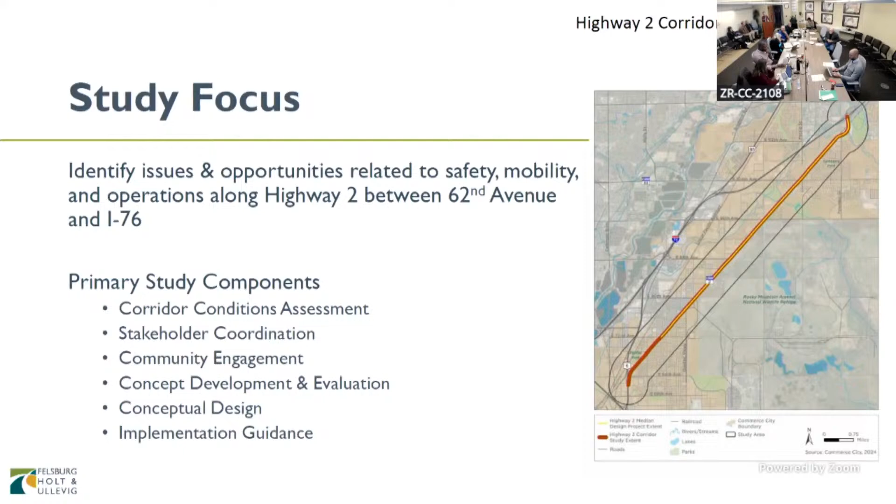These are just a couple highlights from the existing conditions work, the first technical thing we did in the study. One of the primary reasons we're doing this study is that there's a pretty substantial safety concern on the highway. Our analysis period was 2018 to 2022, and in those 5 years there were 134 severe crashes. What we mean by that is a crash that resulted in a fatality and/or injury requiring hospitalization. There were many more total crashes, but we focus on severe crashes because we're trying to make our streets safer and don't want anyone to be hurt.

Traffic volumes along the corridor—it's a 4-lane roadway. Traffic is quite a bit higher in the central part where it goes by the Arsenal, and towards the north it's lowest in the older part of the city, but ranges from 12,000 to 20,000 vehicles per day. An interesting quirk of this corridor is that southbound volumes on Highway 2 are pretty consistently significantly higher than northbound, by about 15 to 20%.

I assume that's probably because, when you think about Highway 2, on the north side, you're bisected by the railroad, so there's not really many connecting streets. On the south side, with the newer and older development, you have a network of local streets you can use as a bypass, but it's just kind of an interesting thing you don't see on a lot of arterial roadways.

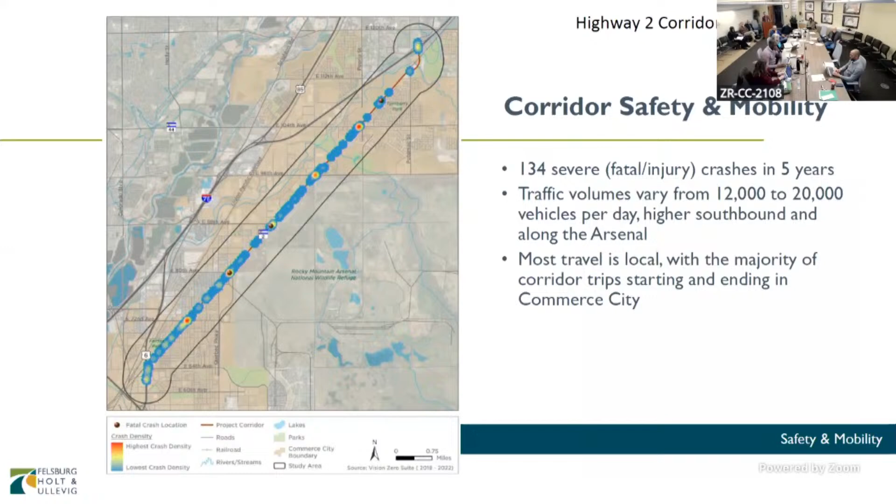In terms of corridor connectivity, another impetus for this study, and something we focused on a lot, is the multimodal element of Highway 2. Highway 2 is a very car-centric road. It works pretty well if you're in a car. It can be, especially on the south side, a very challenging roadway to interface with if you're not in a car.

One benefit of Highway 2 compared to a lot of arterials in the Denver area is the trail already existing along the Arsenal and going all the way north. That's a really high quality, safe, comfortable multimodal bike facility. It's really when you get south of Quebec, where that trail ends, that you just have an attached sidewalk and some striped bike lanes. It's a pretty tough place to be a walker or a biker.

Also, getting across the highway, because of the nature of both surrounding land use and the railroad, there are really only 5 or 6 real intersections along the corridor. So they're all very busy because that's where all the traffic is concentrated. And when you have a really busy intersection, it makes it that much harder, less safe, and less comfortable for someone not in a car to get across. So crossing Highway 2 and traveling along Highway 2 are both things we're looking at.

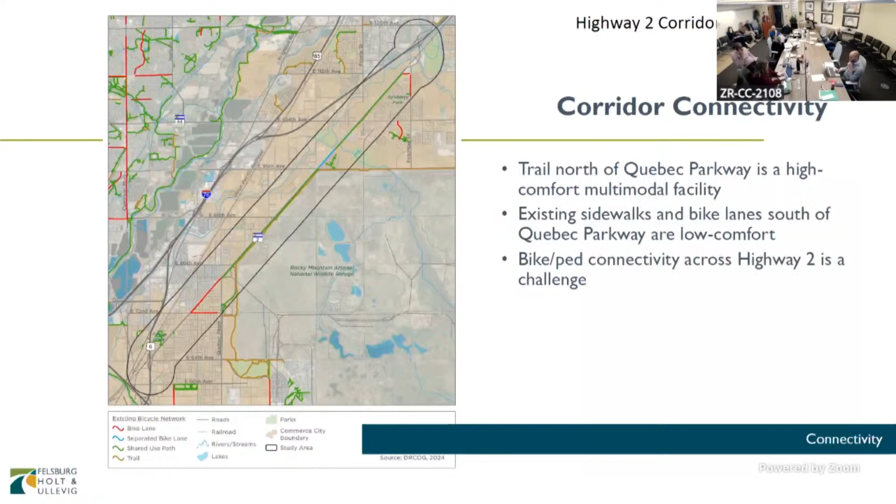I mentioned stakeholder coordination has been a big part of this. Jenna and Mike have been the core Commerce City folks we've worked with on the study, but beyond them we've had a stakeholder coordination group that met periodically throughout the study, including folks from economic development, additional planning, public works staff, and staff from U.S. Fish and Wildlife Service. That's a major stakeholder because they have such a large property directly adjacent to the highway. Their role has been helping us talk through the needs and opportunities for the corridor from their department's or constituents' perspective.

They've helped us review draft interim deliverables we've developed and helped refine corridor recommendations. The other thing we've done regularly throughout the study is coordinate with the other Highway 2 median design project, to make sure what we're recommending is consistent with what they're working on, and what they're designing is consistent with what we're visioning for the corridor. We've had numerous touch points with that team, and they've shared their conceptual drawings with us, which we've integrated into the study as appropriate.

Also, the Commerce City Transportation Master Plan kicked off while we were well into our study, but it's actually being led by some colleagues of mine at FHU. This will build directly into the Commerce City Transportation Master Plan, as the recommendations we have for the highway get replicated as recommendations in the overall Transportation Master Plan. So we're trying to make sure all these different studies are cohesive and looking at the same thing.

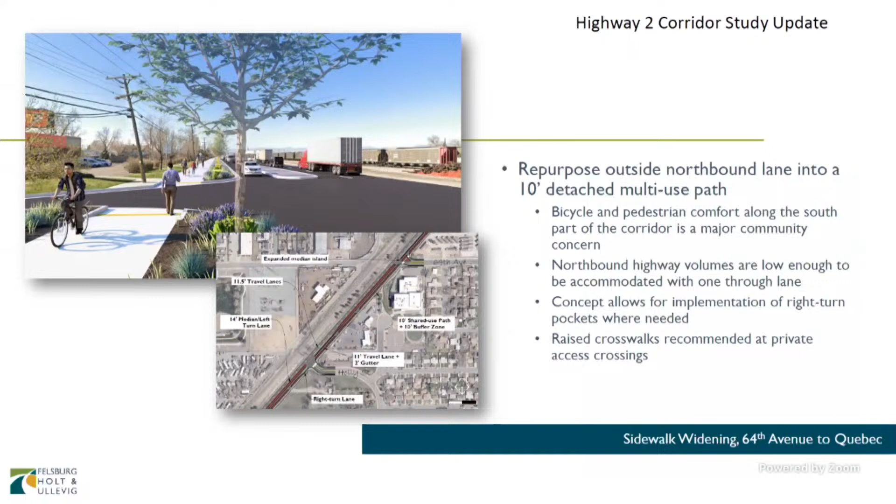Councilmember Douglas: Where would it, from what street to what street, would it be? Is this just one lane? The extents are, I think it's 64th where we've drawn it up as starting, and then up to 80th, I think we're gonna go up to 80th.

Essentially filling in that gap where the trail would go, up to where the trail starts, making it continuous. That would all be on the east side of the highway.

And I don't want to confuse what I said earlier. You can still keep 2 lanes. The lanes right now are 11 feet wide, narrowing down to 10 feet wide. That gives you 2 feet of extra play without having to take property, while still keeping northbound and southbound traffic. But you can look at how you do that within the medians or the road. That's something they called out as an alternative, to get that effect without having to sacrifice that move.

One more quick question: with narrowing it from 11 feet to 10 feet, would that be more prohibitive for truck traffic, more uncomfortable for a truck driver? 10 feet is kind of the minimum lane width you'll see anywhere. Ultimately it's up to Public Works to decide what lane width they're comfortable with.

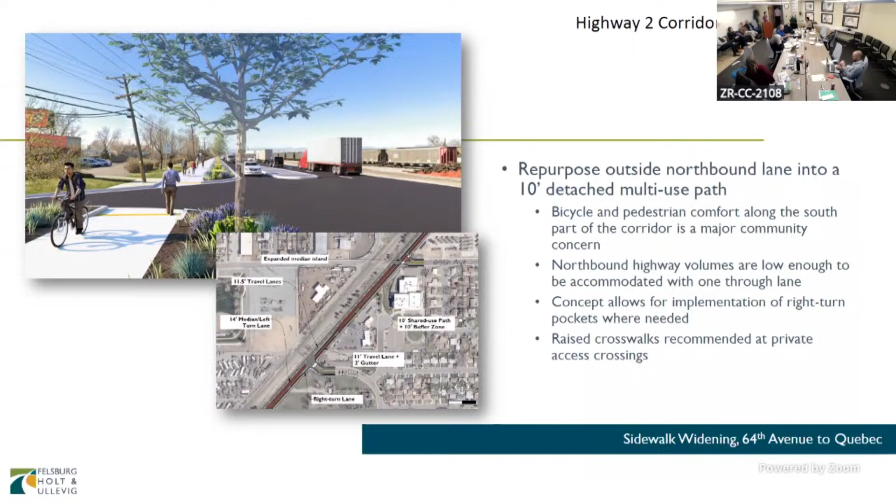There are a lot of 10-foot lanes in the Denver metro area on streets that trucks use, so it doesn't make it impossible, but one benefit, if we're shifting away from the road diet concept, is that narrow lanes have been proven to slow traffic because you feel more confined. That can get us to a similar target of slowing traffic down. It might convince some truck drivers to find an alternate path if they don't like the 10-foot lane, but it wouldn't make it impossible for them to use, everyone would still be able to.

This gets back to crossings of the highway, which matters more if maintaining the capacity of Highway 2 is critical to the future of Commerce City, funneling bike and pedestrian traffic to use the local street network and come up to Highway 2 only when they need to cross. There are already a number of designated pedestrian crossings along the highway, at 64th, 67th, 74th, and Quebec.

Right now those are configured as an RRFB - you push the button, there's a flashing light, and cars are supposed to yield to you. Those are usually recommended for streets that are a little slower and less busy than Highway 2, especially up in Quebec where it widens out and gets faster. The upgraded version of that is called a HAWK signal.

You can also just do a standard pedestrian signal, essentially a traffic signal, which has much higher yielding behavior. Studies have found the yielding behavior at an RRFB crossing to be about 65%, which isn't great - a lot of people have to wait when they should have the right of way. A HAWK signal or pedestrian signal is almost 100%, because it has a red icon, and people associate red with stopping.

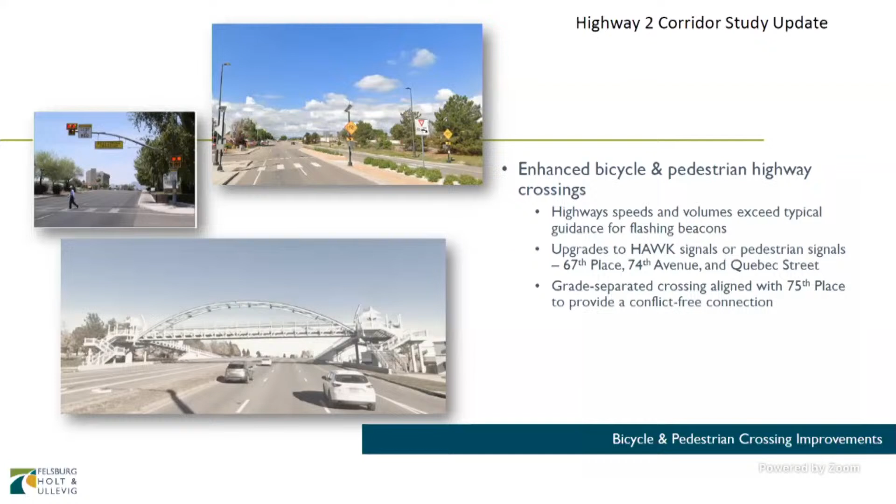Right, thank you. Councilmember Douglas, you okay with this? Yeah. Councilmember Ford? For the most part. Yeah. Councilmember Teeter? Yeah. Okay, all right, thank you, appreciate that.

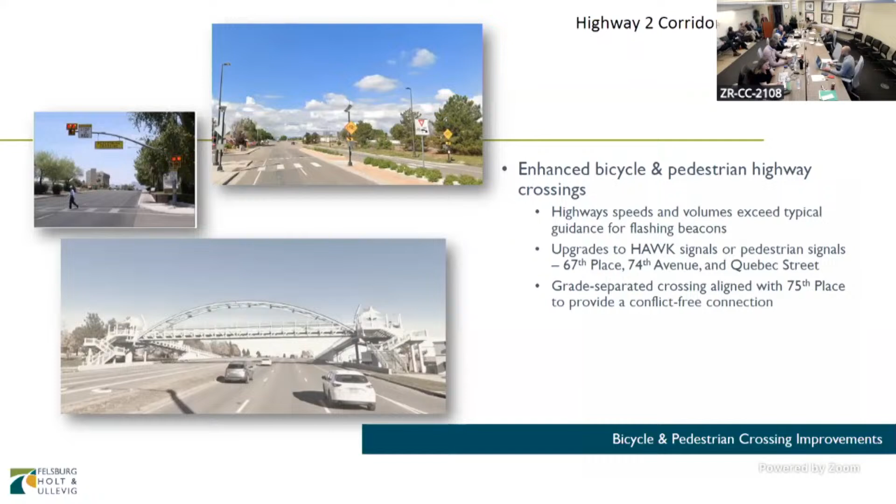Okay, on to another heavy topic: 96th Avenue Sound Wall feasibility and direction discussion.

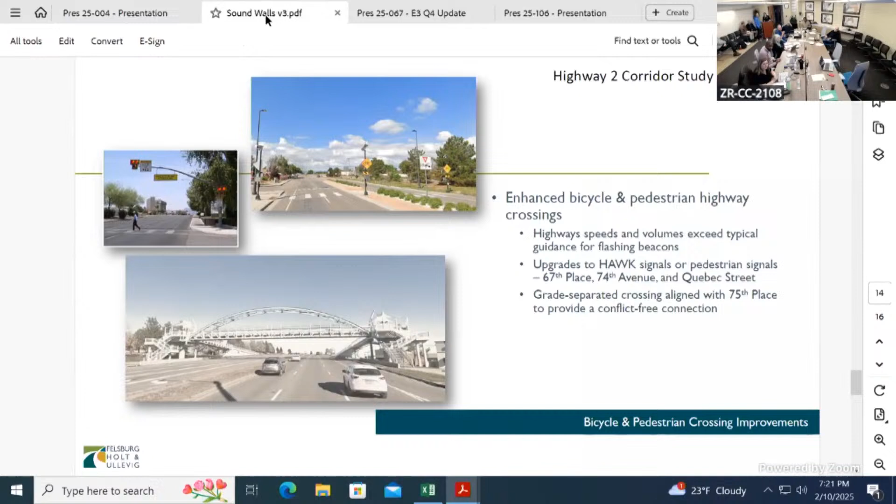Hi everyone, I'm back. The keyboard's not letting me... did I break it? Sorry. No, you didn't break it. So it just felt like... is it just queued up to go into the next presentation? No, this isn't working either. No, it is, okay. It is harder to see from back here. I won't lie, I can't believe I just said that out loud. Fit to screen, is that what I'm on? Are you trying to put full screen here? You can see, okay, your glasses are better than mine.

Thank you, Matthew. Okay, yeah, thank you. Thank you. All right, Mayor, City Council, this evening we will be talking about the 96th Avenue Sound Wall feasibility and direction from you all on how to move forward.

So just a quick summary of our overall 96th Avenue widening project that you all are very familiar with. That project is going to improve East 96th Avenue from Chambers to Tower Road. That project's going to include a 4-lane road with a median divided roadway, associated sidewalks, lighting, landscaping, and of course utilities. There is our future discussion coming up for the potential pedestrian underpass for 96th and Reunion, but we'll discuss that on a later evening.

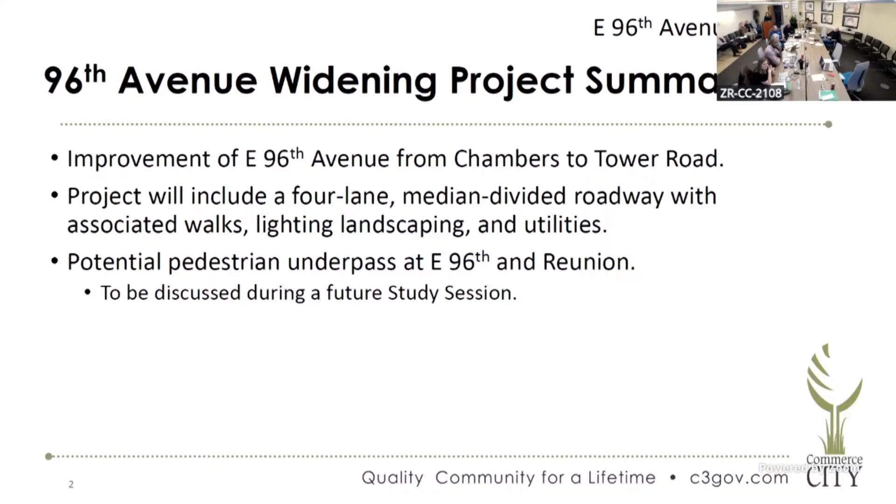So this map here is important because it shows you the project area for not only our 96th Avenue widening project, but also the area that the noise study we're about to discuss looked at. So this shows you the parameters, Chambers to Tower, but I would like to point out that the noise study zone extended 300 feet in all directions from the edge of the proposed travel zone that you see here. So we looked 300 feet in all directions from the 96th Avenue widening project.

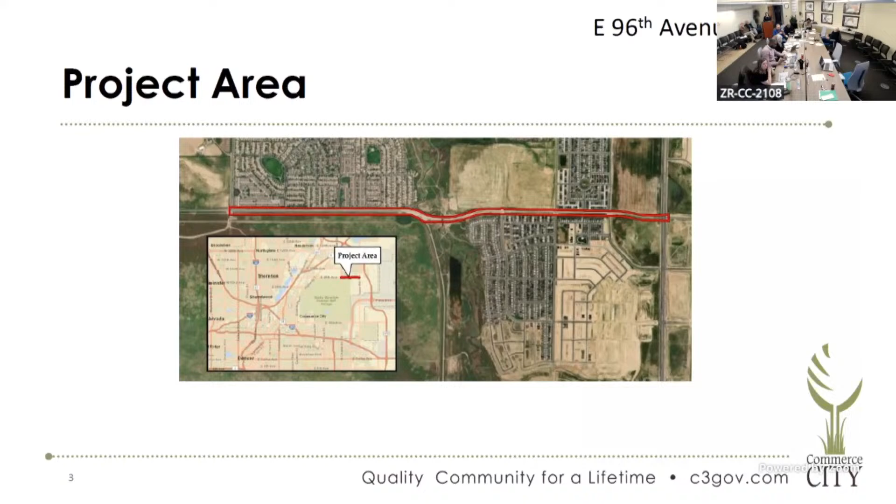So the noise analysis overview that we have for you, some history here: this noise study came at the request of council. Staff did hire a consultant to perform that noise study to assess noise levels that will be generated on 96th Avenue after that widening project is completed. So this noise study looked at a number of factors: what reductions in noise levels could be achieved if we were to construct sound walls, how many homes would benefit from the installation of sound walls, and what the cost would be per beneficiary if we were to construct those sound walls.

So what is a beneficiary? We draw a lot from what CDOT and the FHWA tell us in Public Works, and we specifically did that for this noise study. So CDOT defines a beneficiary as someone who will receive at least a 5 decibel reduction from noise mitigation efforts. So anybody who receives a reduction of 5 decibels or more is therefore considered a benefited receptor. We'll hear that phrasing a lot throughout this presentation.

CDOT also looks at consideration of cost to construct the sound wall, so we pulled from their methodology as well. So per CDOT, we would need to be looking at a cost of no greater than $34,000 per benefited receptor to construct sound walls. And there's a nice definition of cost effectiveness if you care to look into the language that CDOT and FHWA use.

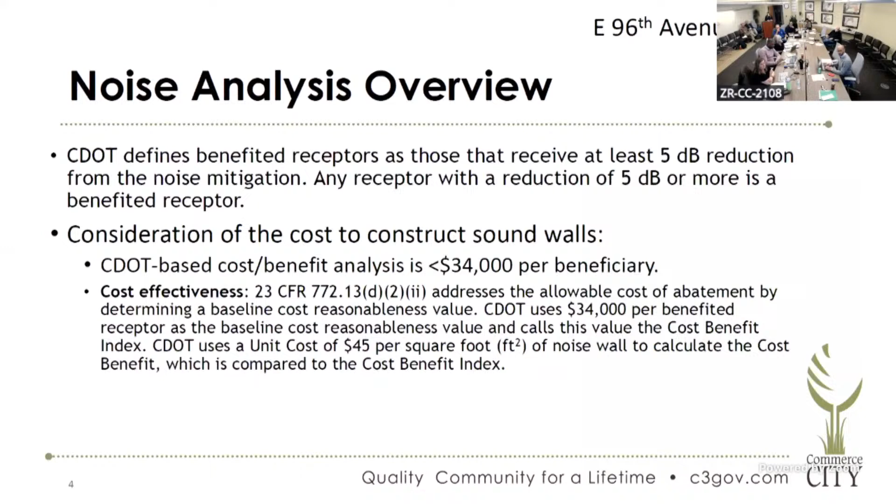So again, that noise analysis was completed in accordance with CDOT's and the FHWA's different studies that they provide for the state of Colorado and other states in the US to follow. That analysis included activities such as conducting field measurements of existing conditions, validating the existing conditions using field measurement results, modeling existing conditions, modeling proposed actions for the design roadway, evaluating noise abatement, and modeling distances for unpermitted, undeveloped land. So what does that all really mean, right?

So in this analysis of the noise report, we took all of this work that CDOT or our consultant did, and we took a step back and asked ourselves: where would it actually make sense to put in these sound walls? We looked at the map a couple slides ago, but several of the homes that would be impacted actually face the front of the roadway.

So in the map analysis on the west and east sides of the roadway that we'll look at in a couple slides, we did not consider building sound walls in front of 34 homes on the eastern section and 43 homes on the western section. That's because those properties have front yards facing the roadway, and staff's perspective is that building noise walls in front yards would likely not be well received by the community.

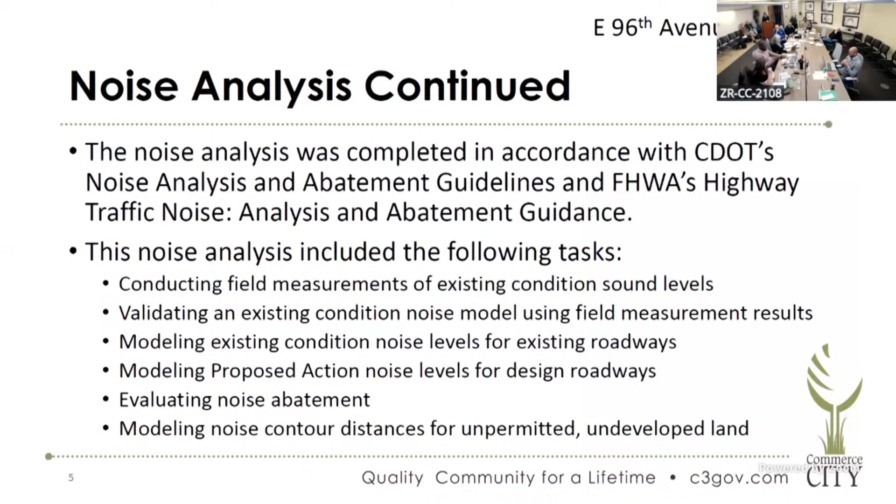So here's what the western sound wall segment would be, again taking out those 43 front-facing homes. That leaves us with 12 beneficiaries of the sound wall. The projected cost of just construction is $635,000, which breaks down to $53,000 per beneficiary — greater than CDOT's recommendation of $34,000 or less per beneficiary.

That said, if we were to add in the 43 front-facing homes, the cost per beneficiary would come down from $53,000 to $11,545. So depending on where you want to put the walls, CDOT guidelines would say it is or is not warranted.

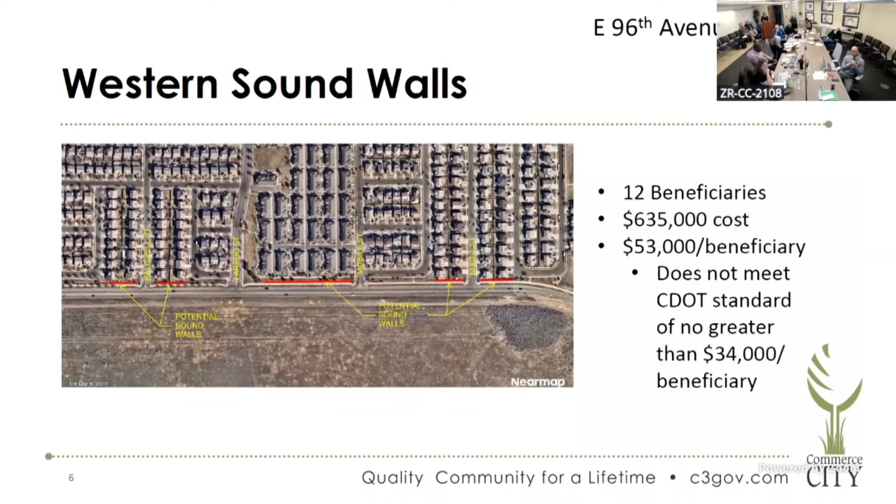Same concept on the eastern sound walls. These numbers do not include the 34 front-facing homes. So in this scenario, we'd have 30 beneficiaries and a cost of $1.1 million for construction of the sound walls. This breaks down to $39,000 per beneficiary.

If we add back in the 34 front-facing homes, that cost reduces to $18,000 per beneficiary. So again, whether or not we include that front-facing home group dictates whether or not the cost, per CDOT terms, warrants a sound wall.

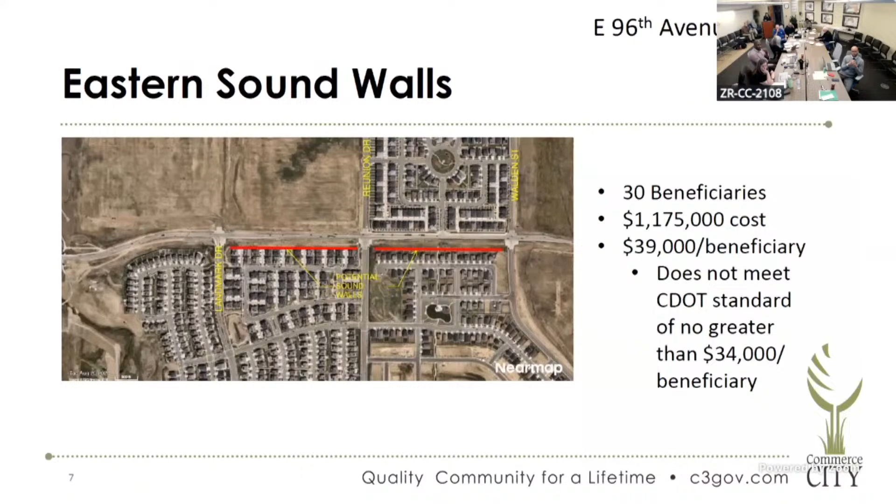So there's a good conversation we need to have around next steps, because staff looked at this through the lens of what CDOT and the FHWA would recommend. What would CDOT do if it were their roadway? What would another municipality in Colorado do? Because we simply don't have a policy about sound walls.

So we leaned on some pretty solid existing policies, but that doesn't mean we can't depart from what CDOT and staff are recommending. Our recommendations to you are purely based on what CDOT guides us to do. So because the construction costs for those sound walls surpass the threshold from CDOT and FHWA, we don't recommend moving forward with sound walls for noise abatement for this project.

However, council absolutely has the ability to direct staff to move forward with constructing sound walls separate from CDOT's guidelines. So we would then ask you, which segments are you interested in funding? And we would go ahead and work with a contractor to conduct public meetings with the beneficiaries of those proposed sound walls.

And per CDOT guidelines, we would be seeking approval of 50% or more of residents who would have these sound walls put in either their front or back yards. Again, that's per CDOT guidelines. If you all don't want to pursue resident buy-in, we don't have to do that.

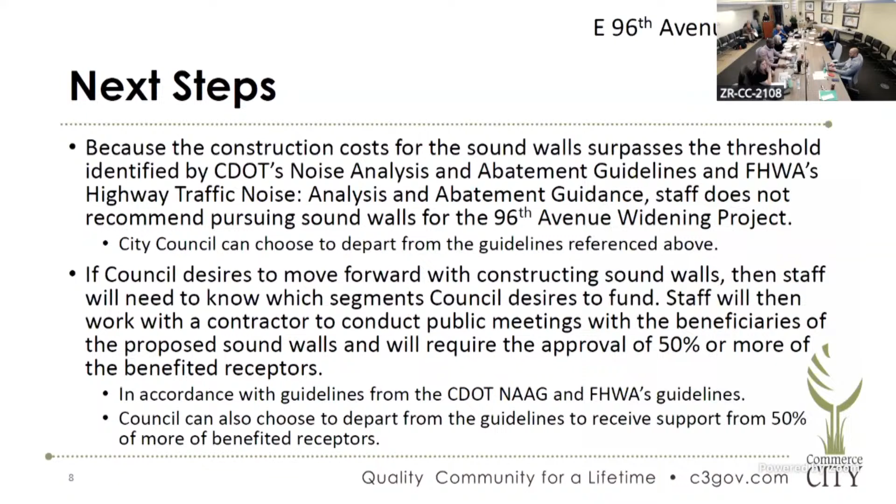So really what it comes down to is, do you want to build sound walls, yes or no? If so, do you want to put them along the whole roadway? Do you want to take the staff approach of only constructing them where they wouldn't be in front of yards? Do you want us to seek residential support or not? There's a larger conversation we want to have about what your policy approach will be to sound walls, not only for 96th Avenue, but for the rest of the city, because whatever we decide here is a model we'll have to follow elsewhere. So a lot of information, but this is intended to be a discussion on what council desires to do.

Okay, can I ask the question? Was this even brought up in the neighborhood discussion first, before it came to this point? No, because the direction we received at the time from council was to conduct the noise study. We would then come back to you all with the results, which is what we're doing now. So residents have not been engaged outside of, if any of them saw and provided comment in response to the study session material.

I'll hold mine, Councilmember Ford, then I'll go to Councilmember Kim. For me, number one, after reading through the material, the noise study, I don't think it covered a big enough span of time to get an accurate reading of exactly what the noise is like. I think we have to have a 24-hour scenario on a work day to understand the significance of the noise.

Okay, energy, equity and environment, 2024 quarterly update. Libby Tart, Senior Environmental Planner. Thank you.

Hi, my name is Libby Tart and I'm with the Energy, Equity and Environment Division. We're here to present our quarterly 4 update, that would be October to December of last year. To reinforce, our division is responsible for the Sustainability Action Plan that was adopted in July of 2023, and it has 10 different initiatives that are on your screen. So we work on a myriad of different topic areas involving sustainability and the environment.